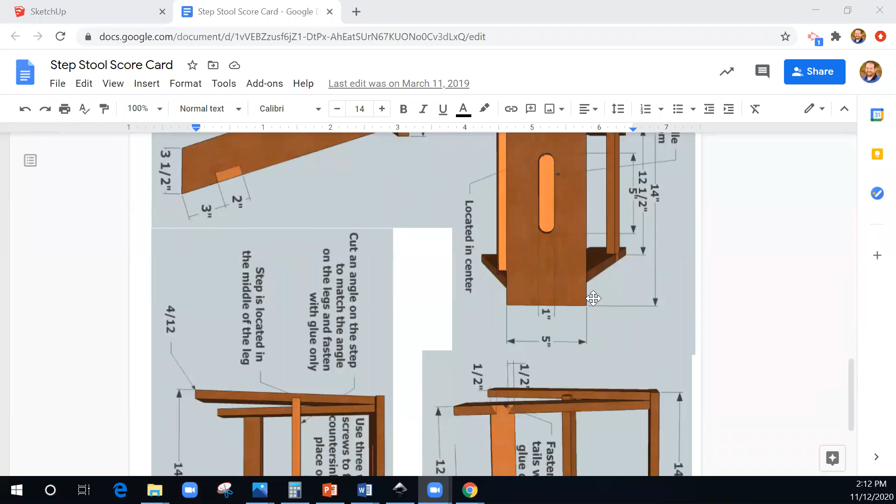Let me share this screen here. I'm going to focus on the step stool. It doesn't matter which one you build, I'm just picking this one because we did the video on the bar stool. A lot of similar concepts, a lot of similar things, but what I'll show you here will be very similar to the other one. Some of it might be almost exactly the same.

The biggest thing with this, notice how I have this build here with all the pieces, like the step stool combined together. But basically we have all these different pieces, and we really just need to focus on building those pieces. There's a couple things I'm going to tell you today that's going to make life a little bit easier, because some of this stuff you may not understand.

If you've watched the videos, hopefully you've done those and seen that build, because we do talk about the angle right here, this 4/12 angle. We talk about what that is, but I'm going to give you guys a little more information on that as far as building it, because it's a little different than doing it in person, or using a framing square to get that angle.

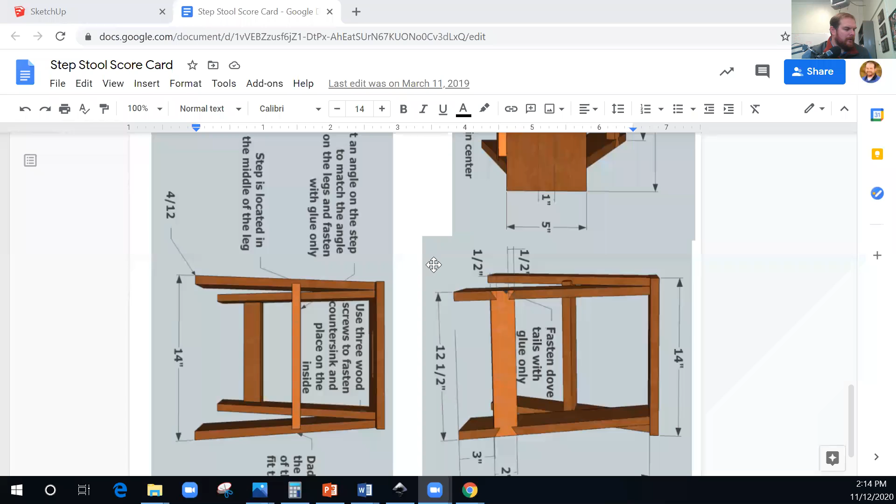Essentially what we want to do is just build a piece and build this out. It doesn't really matter where you start. I'm going to start with this little top piece right here, and then we're just going to build everything down underneath that. So this one is pretty easy, right?

We've got a rectangle, and then we've got a hole that's in the center. I may not show you all these dimensions—you guys have access to this stuff. What I'm more concerned with is not just giving you the right dimensions, obviously you can go back and forth with these things when building this. That's not a big deal, but it's more about how we're going to go about that process and how we're going to do that.

Question? Or is that one of the students coming in?

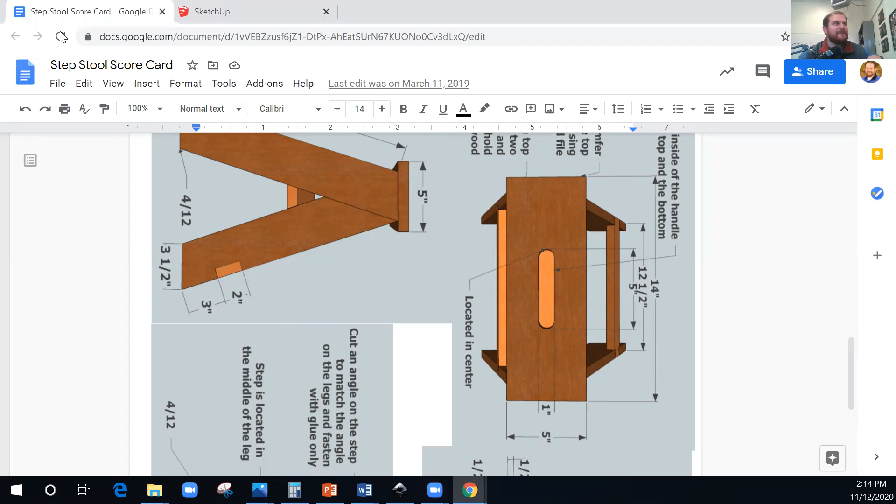Okay, so I'm going to have the dimensions up, but just for the sake of time, without having to sit there and make sure we get all these dimensions going back and forth, we're just going to build it from there.

Probably the best thing is to orient yourself, right? Grab that orbit tool. If you remember, we can hit shift when we're in this orbit tool, and we get this little hand where it'll shift things aside. We can orient this—I prefer to have it like a top view. So I'm just getting that stuff situated.

Now on the top of our step stool, we have a rectangle, and we want that rectangle to be 5 inches by 14 inches. So we're going to draw this rectangle, quickly click this, and stretch it in our right direction. We're not holding on to our mouse, if you remember that. And this is going to automatically go in feet and inches, because that's the template I selected. So I can simply put in 5.

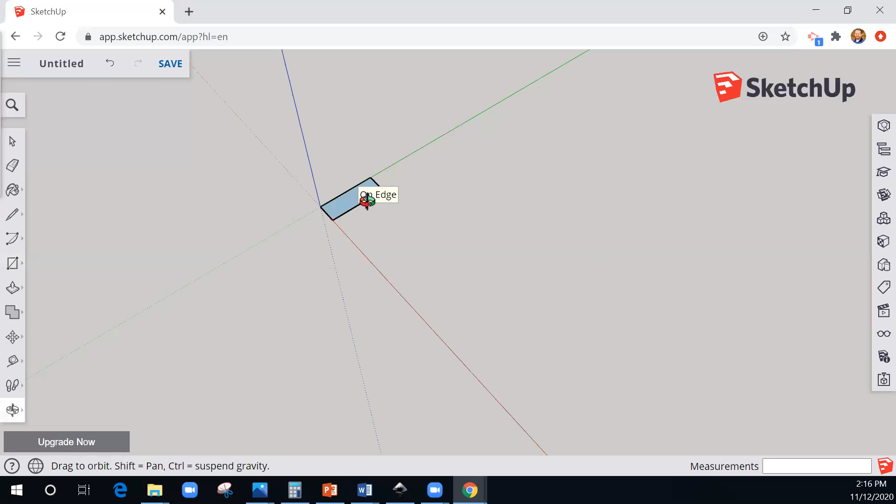I don't need to put the inch marks, just a comma, and I'm pretty sure we decided you don't have to put a space. So if I wanted a 5 by 14 rectangle, I could just do 5, 14, and it's going to automatically put this into inches. You can see we've got that rectangle there. I'm going to hit the O button on my keyboard to quickly get into the orbit function.

So this is kind of the start of our top piece. Now, how you do this can vary a little bit. You can stretch this thing out and make it a 3-dimensional object right now, or you can try to cut out that little circular part, that handle portion on this top step. It doesn't matter which way you do it, but it may be a little easier to build it in the flat position like this, and that's what we're going to do.

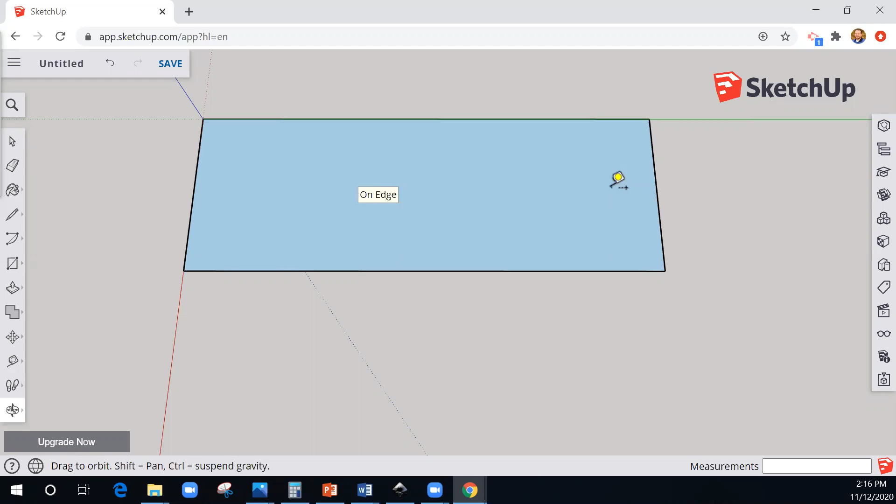When you're designing these things and putting them together, it's important to have your tape measure tool. You can hit T for tape measure, or go down here and you'll see it's got a tape measure. These create grid points, and they're not actually lines, they're just marking points. If you click your mouse, it'll automatically snap to that. So if I click here and draw a line, notice how it hits that intersection. I could draw a line up, and we've done that.

If you guys remember when we did that dustpan, it's really the same exact process, but we're going to hit escape and go Control Z to undo those lines, because we don't want that.

Now this handle is going to be 5 inches wide from the sides, and we want this thing in the direct center. So with these grid points, we can grab this little tape measure, and we know this thing is 14 inches here, so we'll type in 7 to get our 7 inches. We know it's 5 inches here, half of 5 inches is 2.5, so I'm just going to stretch those two things in that direction and get 2.5 here. That's going to help us out.

Now we've got this little center point. We want to make sure we have these things, and we want this to be 5 inches in total length. So to do this, we want to measure 2.5 one way and 2.5 the other way. But there's a bit of a complication because we have a circle that's going to be here, and we want that circle to be the very outside edge.

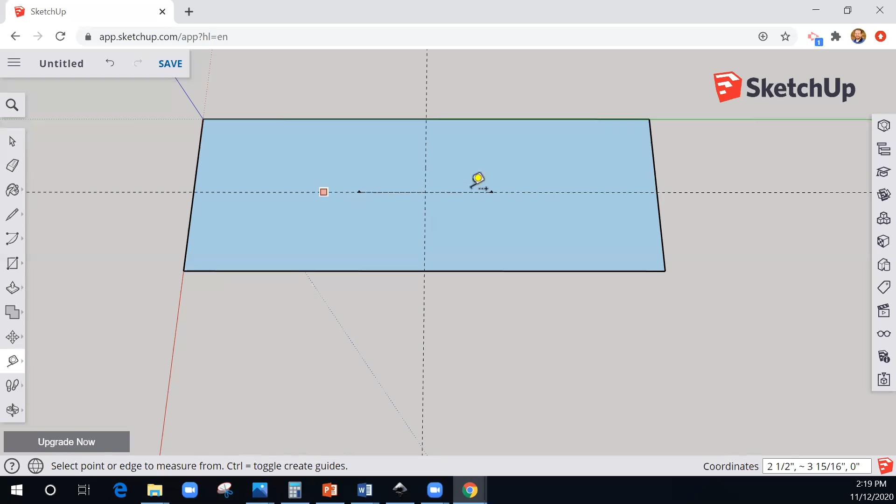The width of this handle needs to be 1 inch wide. So when we draw a circle, we're going to draw it from the center, and it's going to extend out a half inch this way and a half inch that way. But that's going to give us our 1 inch width. And it's also going to add a half inch here, and the same thing's going to happen here, a half inch. So the total length from one end to the other is going to be 5 inches.

This is the same stuff we would do as we're laying this out on a piece of wood. It's exactly the same process, we're just doing it on a computer as opposed to anything else.

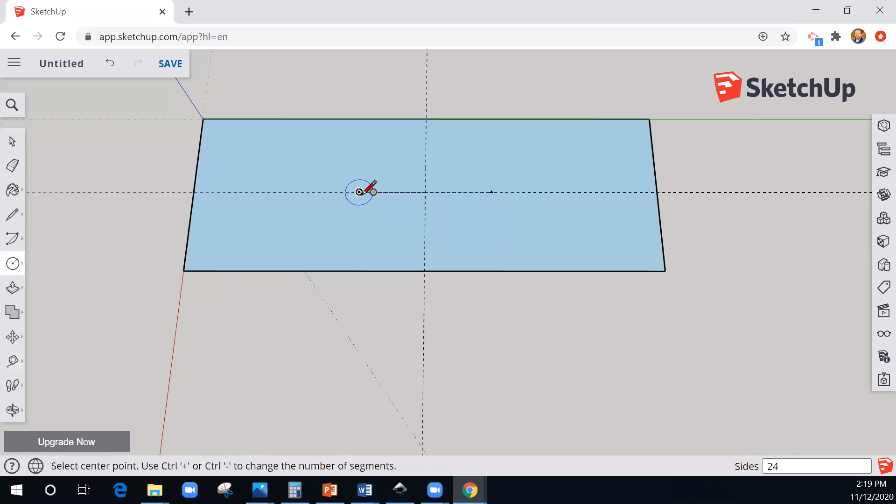So I'm going to hit C on my keyboard to get my circle tool. I can stretch this thing out. These things measure the diameter, so we want a 1 inch circle, or actually they measure the radius, so we want a 1 inch diameter circle, meaning we're going to put a half inch, 0.5, on there. You'll notice we get a little circle there. We're going to do the same thing on this side, and get 0.5 right there.

Now we've got kind of the portion of our handle. All we got to do now is draw a line from the very top right here to the very top right there, and then delete some of these things. We'll do the same on the bottom. I'm going to hit L for my line tool, or grab the little pencil right there, and draw a line connecting those two points together. Same thing right there and right there. Now we've got these things.

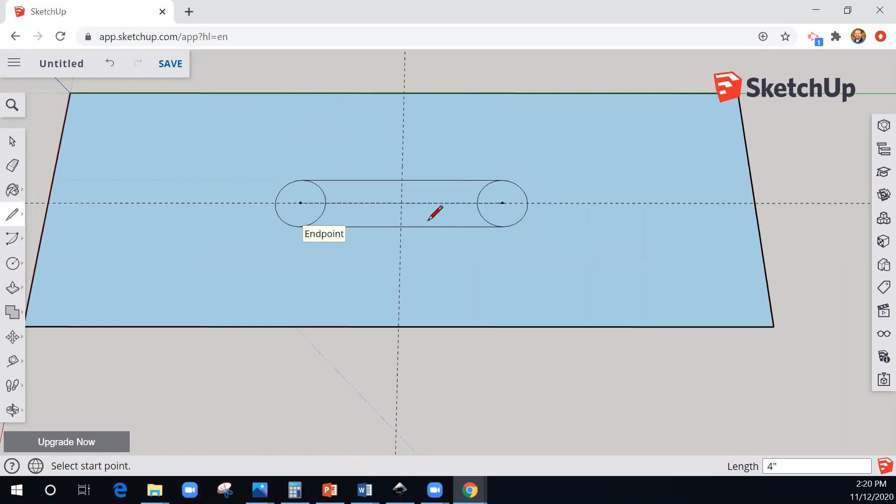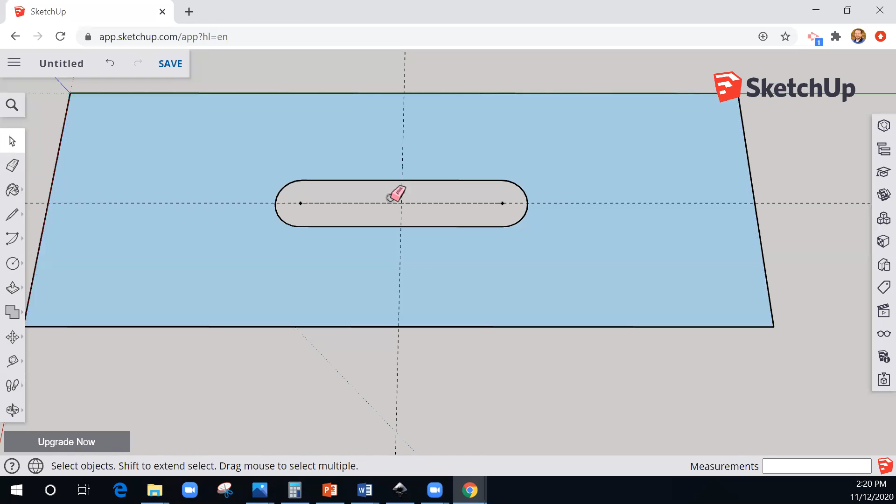We want to simply erase that center portion, so we grab the eraser tool, or hit E to do that. We've got those things there. Now spacebar gets you back to your selection tool. Notice I can select that and select this as two separate pieces now, since this has joined those things up. I'm going to select that center portion and delete it, and erase these measurement marks here just to get rid of them.

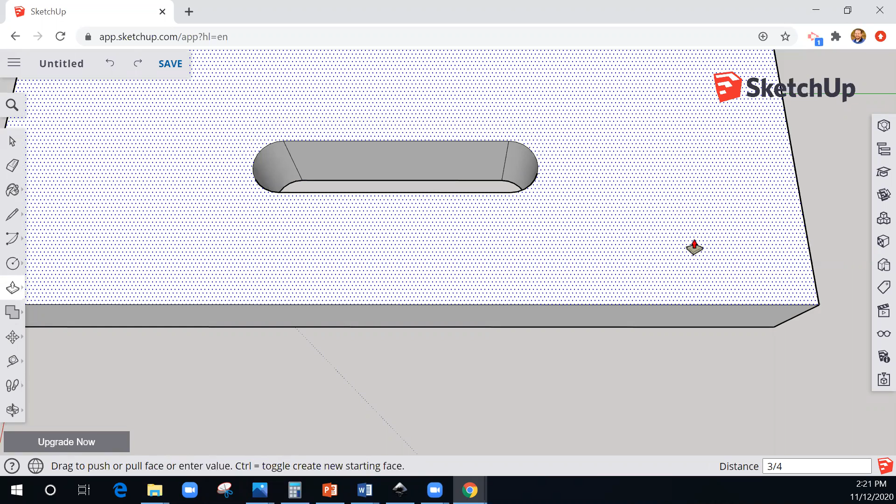Now the last thing I need to do is my push-pull, which you can find right here, or you can hit P for push-pull. Quickly click on that and you can raise this thing up. All of these boards, every thickness, is going to be 3/4 of an inch thick, so we can type in 3/4 and hit enter. If we orbit around, you'll notice we now have that little top piece basically situated here. So you've got that top piece created.

We can color this. I don't know if I've shown you guys how to color these things at all, but we can color them if you want to. It's not incredibly necessary, but it does kind of dress it up a little bit.

What we're going to do is go to our little bucket right here. We can find different materials if we want. So if we go over to the little search thing, if this is going to be a woodworking project, we would obviously want to have it as wood. You can select the piece that you want, and if you like this color, click on that and paint those things. You can go around and hit all.

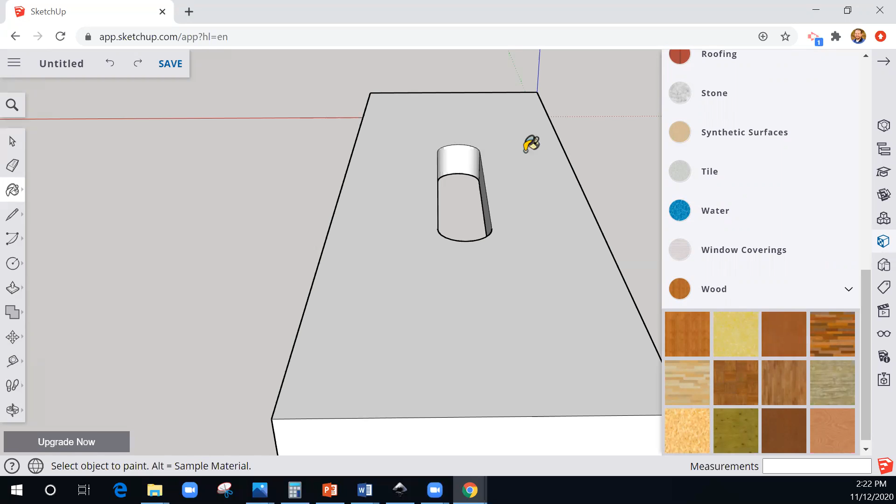Why is my computer not working?

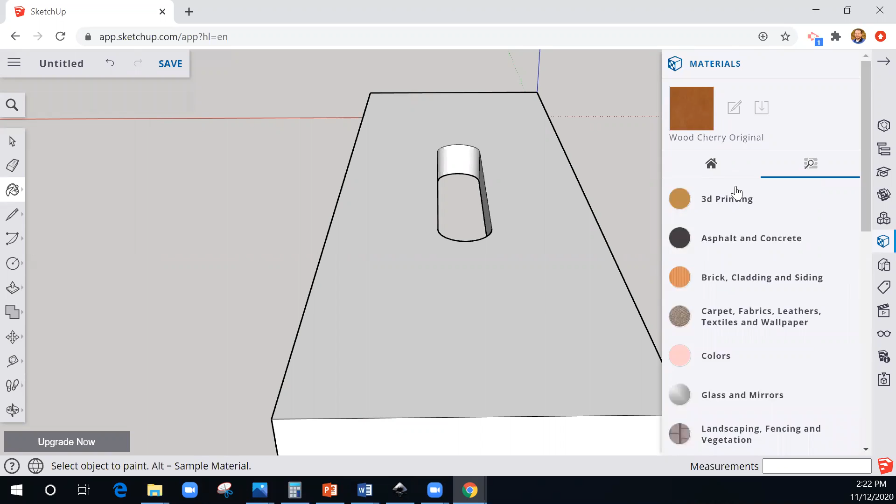Naturally, so we did a wood cherry right there. There should be a way - I forget on this online version - that we can adjust the material a little bit, but I'm not seeing it right now. My computer does not want to run. It is not working well for me.

Okay, there we go, so we can kind of paint that. And you'll notice it's a little bit fuzzy. There is a way to do this, let's see. No, I don't want to do that. Okay, I'm not worried about that, I'll have to figure this thing out.

But if you want to color, you can color these things any color. You can click on all these things here and do that. Or if you want...

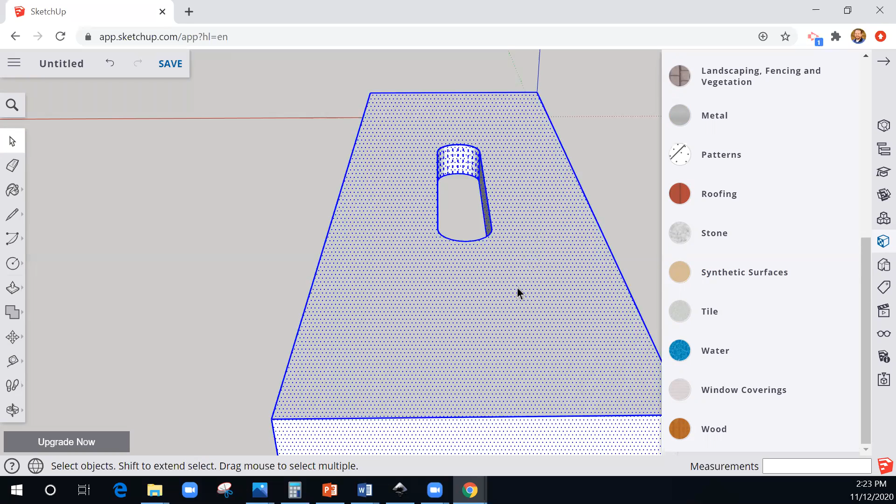Before we get to the step of painting, we're getting our selection tool, and this is kind of an important aspect. If you're building these things, you're building them a piece at a time, and then you want to put them all together so we can orient them. Notice I just triple click this - notice how it highlights everything. Not a double click, I don't want to just grab one surface right here. I want to triple click so that way I get everything in this.

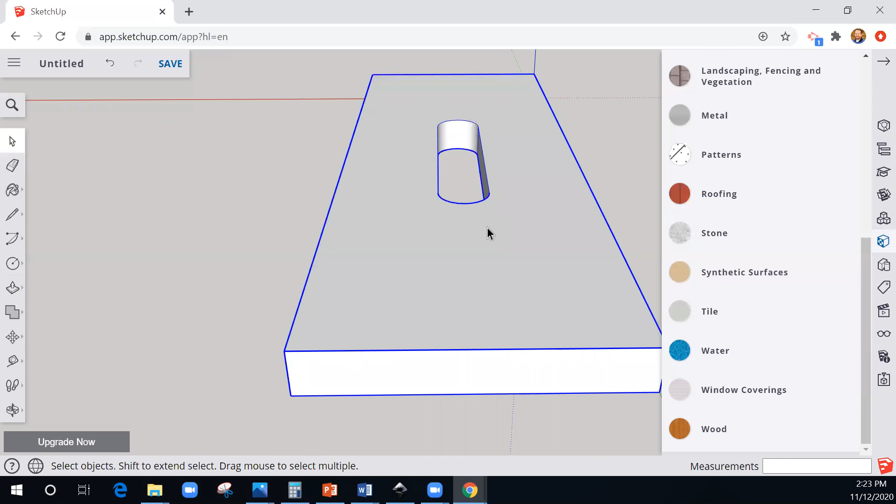You can go ahead and right click, and make this a component. I'm going to label this the top step because that's what it is. I hit enter, and now this piece is one united piece. You can click into here - notice how you get this little dotted line box. You can still edit and modify this if you need to, but if I put another piece on top of this, it's not going to stick them and glue them together. I think I've shown you guys that, but just to reiterate that stuff again.

If you like a different color, you can change these things, make them whatever color you want - completely up to you on how you want to handle that stuff. But anyway, we'll just leave it like that. We've got that little piece there. Now the color just kind of dresses it up a little bit.

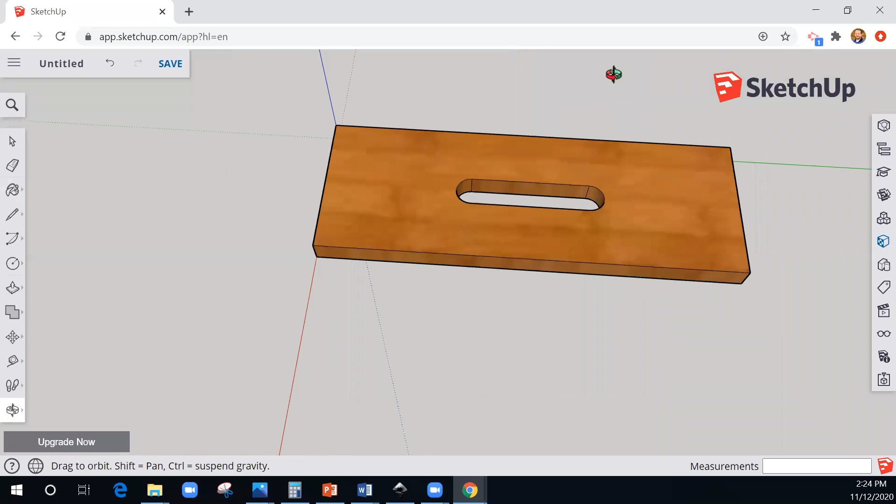Now there's a couple of things with your legs, and these things are going to be a little bit different, okay? Because that's probably the next thing that we want to build in here - our legs. And you'll notice on these legs, if I can bring this thing back into here... that's not the right thing. Go away.

So on these legs, they're 17 inches. You'll notice there's an angle. The angle on these things is a 412. If you don't know that, you can look up into right here, leg angles 412.

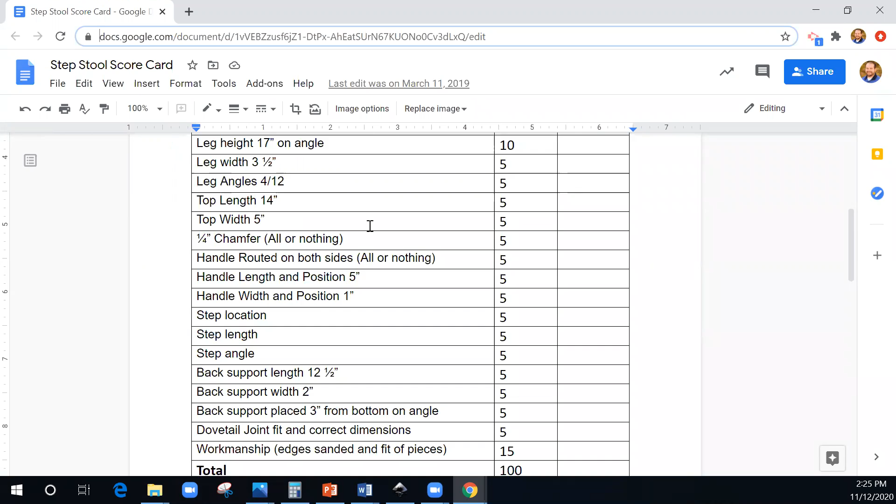Now, what a 412 means - I hope you guys have watched the video because it does explain that - but 412 essentially is what we determine as rise over run. If you think from a math class, it basically is saying that for every 12 inches you go across, you're going to rise up 4 inches. This all has to do with building rafters and things like that, and that's kind of how we get those angles.

So the purpose of that is so we can teach you how to use a framing square properly. Again, in the woodworking video, it demonstrates that. If you haven't watched that, watch it because it's going to explain that and you'll be able to see what I'm talking about.

But for a 412, or if it's the bar stool, it's a 212 - it doesn't matter. It's really kind of the same process on how we do that, but the angle is obviously going to be a little bit different. When you think about rise over run, you're basically saying for every 12 inches we go over, we're going to rise up 4 inches.

And we could do the math and try to figure this out, but I'm just going to tell you that if it's a 212, we're going to do a 10-degree angle, and if it's a 412, it's going to be a 15-degree angle. Those are roughly close to what the angles are going to be on these pieces.

So that's going to be kind of important. We want these legs to be 17 inches on the angle, and we want these things to be a parallelogram. A parallelogram is basically a tilted rectangle. We don't want a trapezoid, right? We want a parallelogram, so we want to make sure this angle is going to match up with that angle right there. So that's kind of some important things.

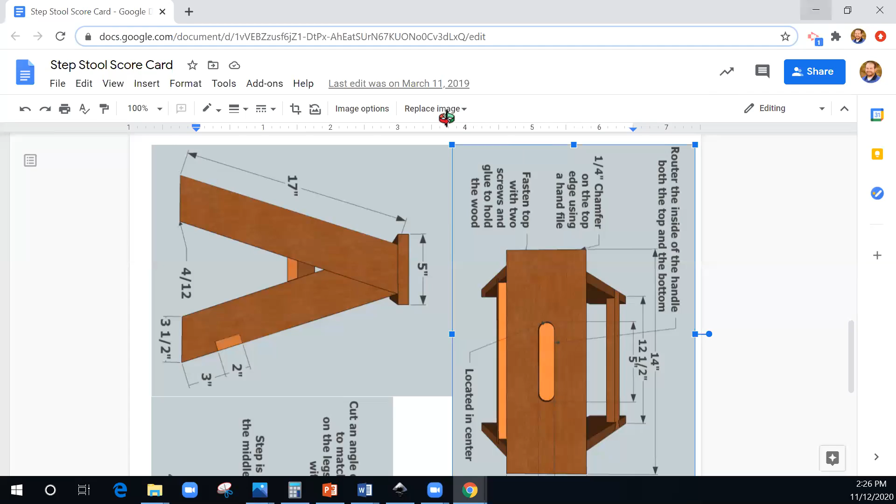We're going to be 3.5 inches wide on these things as well. Now you could build these things in place, or we can just stop and get these things oriented later. So I'm just going to build them separate here, and then I'll show you how we can modify them. Oh, one other thing on these legs.

There are 2 front legs that are a mirror image of each other to accept this little piece right there. You'll notice we have a little notch out of that leg. And then the 2 back legs are going to have that little dovetail that's going to be in those things. So those ones are going to be identical, but the 2 front legs are going to be a mirror image of itself.

But we can save ourselves a lot of time, and it's the same thing with the bar stool if you decide to do that. You can save yourself a lot of time by building these things. So we know we want to be 17 inches. When we go to cut these boards, because when you cut the angles, they're going to be a little bit smaller, we actually want to cut these things to 3.5 by 19 inches.

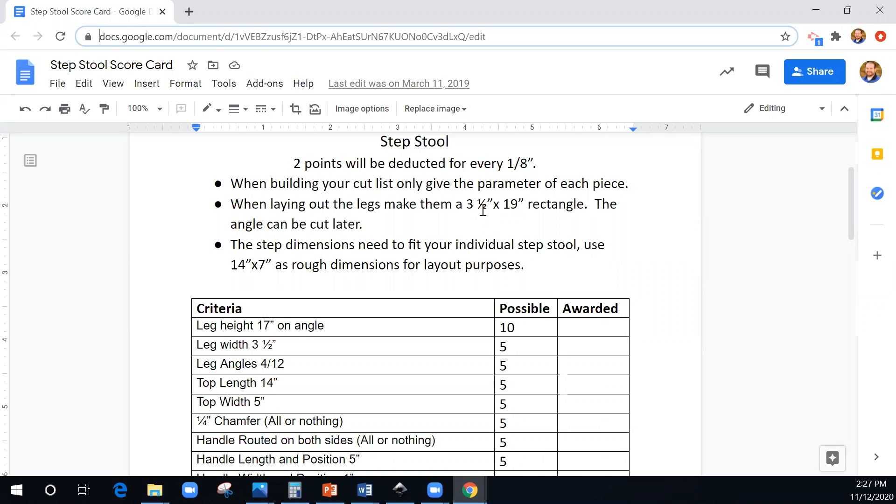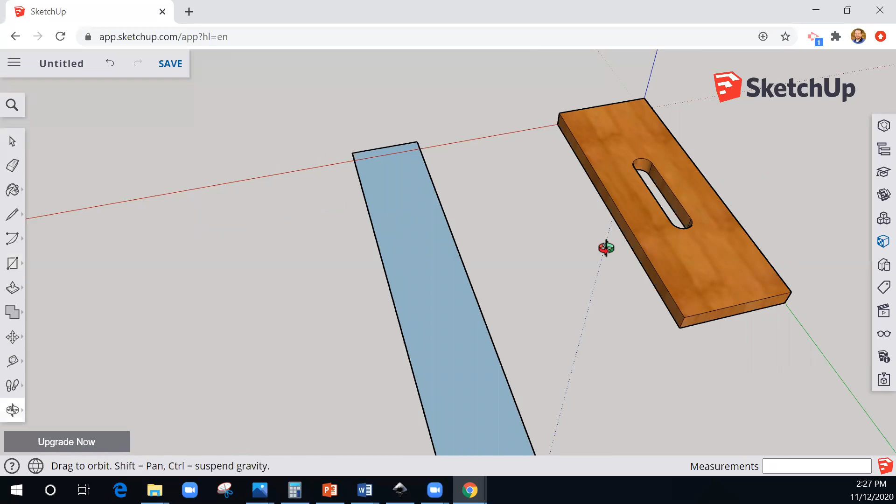And so we're going to do the same thing in Google SketchUp. We're going to grab a rectangle - I'm going to hit R for rectangle. I'm going to grab this leg and just stretch those things out. I know I want to be 3.5 inches, and I want to be 19. We're going to trim these things down a little bit here, so it's not going to matter too much.

I'll show you kind of another way. We can raise this thing up to where we have that 3/4 inch right now.

And then we can get our angles built in. To get our angles, what we need to do is go down here to the little tape measure tool there. You're going to see it's a protractor. So now we've got a protractor here.

What we're going to do is click on that corner - notice how it sits there and is oriented. We're going to click up there, and then we're just going to go, look at it snapping to a 15-degree angle. We'll type in 15 and hit enter.

What we want to do is the same thing on this, but first we want to grab our tape measure tool and measure 17 inches right here, because it's got to be 17 inches on the angle. Notice we've got this little point right here that it gives us. We're going to go back to our protractor tool.

We're going to click right here. We're going to stay perpendicular, go that way, and then type in again that 15-degree angle, and hit enter. That's going to give us our 17 inches on the angle there that we need.

We can now take our line tool and draw these things across. We'll do the same thing on this side, clicking in both spots. And like I said on the other one, you could have raised it up and then done it, or do all the layout work and then just raise it up.

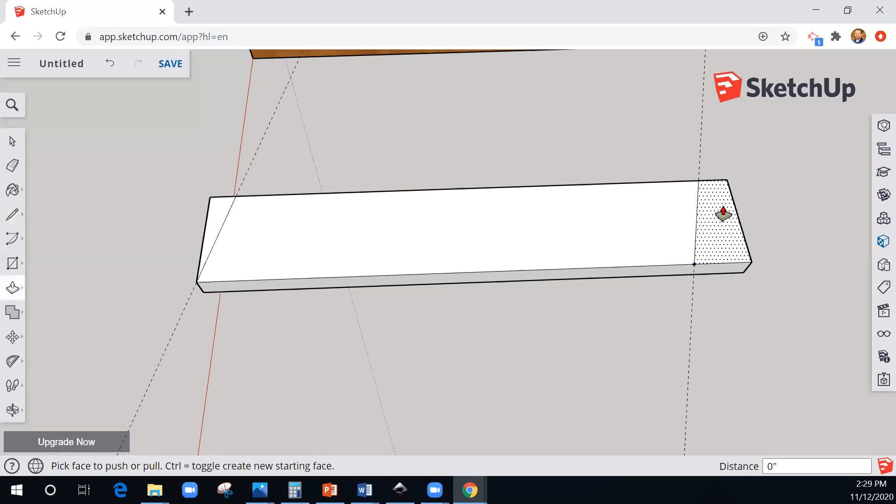On this one, to basically erase these lines, we're just going to take that push-pull again. So I hit P to get push-pull, and I'm just going to drop this thing down to 0, and notice how it erases that. We're going to do the same thing right here where we just drop that down. And now if you look at this, we've got a little angle right there.

That's kind of the base leg that we have, okay? Now, if we wanted to, what we could do with this to save you guys a little bit of time, I'm going to erase these 2 lines right there.

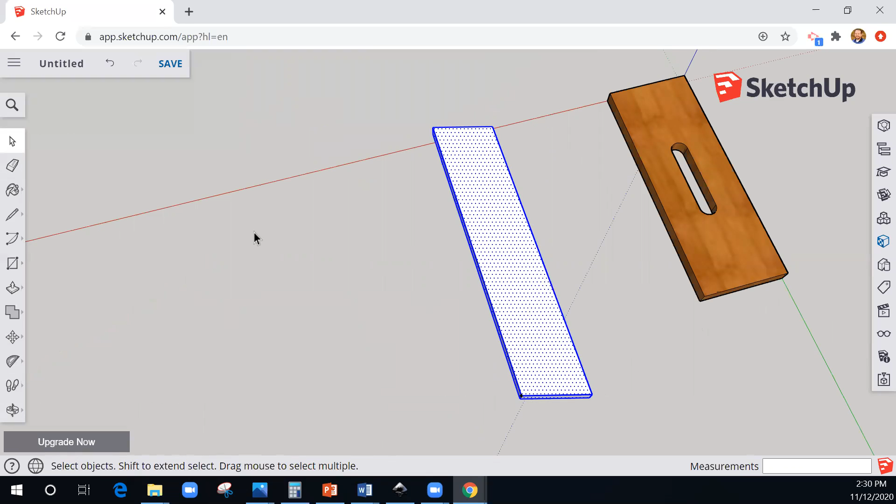What we can do with this, grab our selection tool. We can grab that whole thing and we can go just like a standard Word program or something - we can say Control C to copy it and then Control V to paste it. And you'll notice now I got 2 copies, I'm just going to set that thing right there.

So the nice thing with this is I've got 2 copies of these things. This is exactly what we want, this is what we're looking for. On the back side of one of these things, we'll do one leg here - we'll do this leg, we're going to put this leg, it's going to be the dovetail, and we're going to need 2 of these things.

So to save yourself some time, you're basically going to do this once - you don't have to do this twice. If you do the bar stool, all 4 legs are identical to each other, so you do one, and then you can simply just copy them across. With this one, there's 2 different legs - one is not necessarily harder than the other, they both have some differences to them.

But let's say I don't really like the orientation on this thing. So what I'm going to do is take this little move tool here, I'm going to go rotate. What I'm going to do is try to get it on this green axis right here - see how I can hover here?

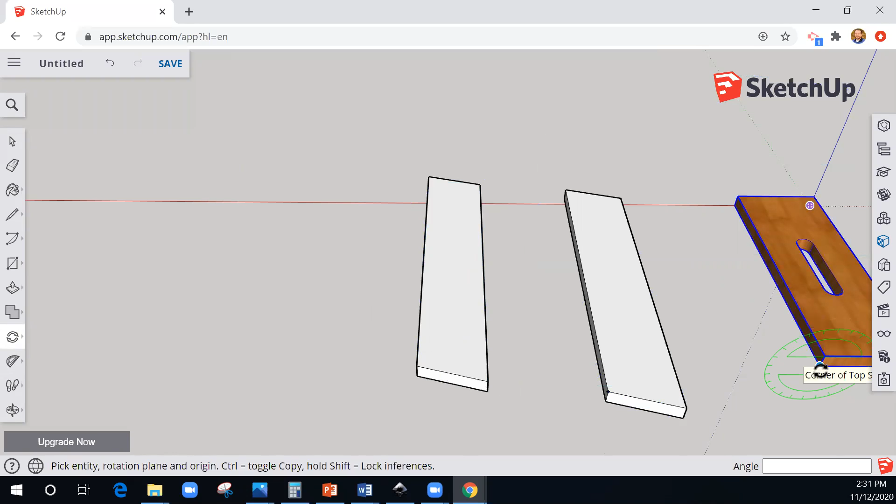I'm not going to click there, I'm just going to hold it there to where it's got my green. Right here, see how it's kind of blue? What I want to do is flip this thing and rotate this up. Maybe it's probably best to just show you.

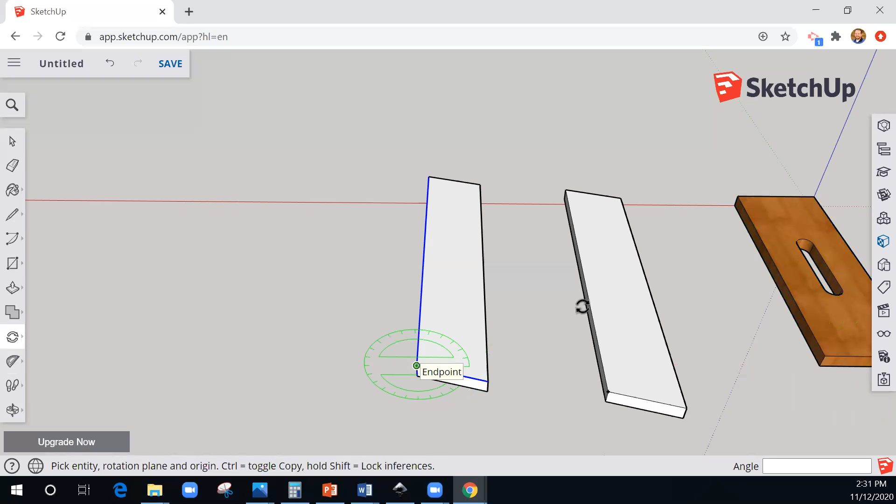So I'm going to take this right here, hold shift. I'm not clicking there, and then I'm going to click on this little top piece right there - oh, I got to select this whole thing. Let me get out of here, alright let me select that whole thing there, and then I'm going to hit rotate.

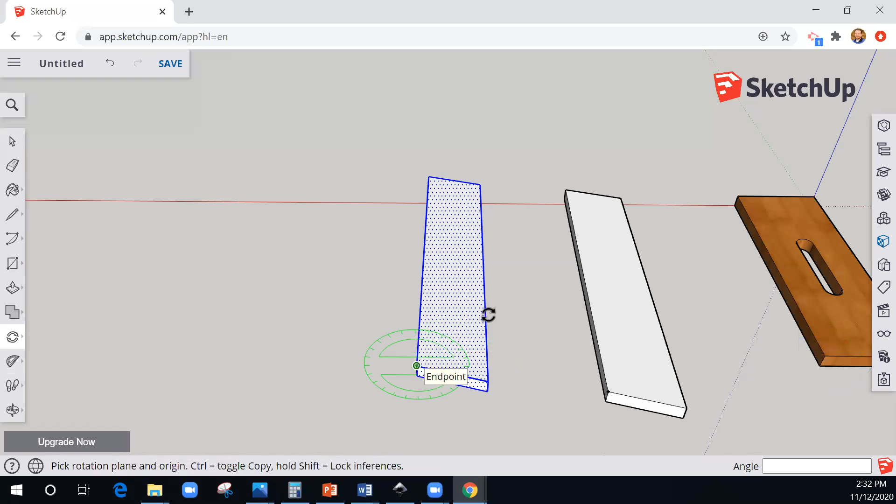No, that's rectangle, I don't know what my rotate key is - I'm just going to go to this thing, I'm going to go to rotate. Notice I got that whole thing selected. I'm going to go over to this little piece right here where it's going to be on that green axis, hold shift, grab this top corner, click right there in that top corner, click on this red axis, and then now I can just flip this piece up right here.

So now we've got that piece that's there, oriented a little bit better. On this piece, without going too much into dimensions, we're going to create that little dovetail. From this point up, we've got to have 3 inches up.

Okay, so we want to be 3 inches up from the bottom, and then we're going to be 2 inches up from there.

I want a line, so I'm just going to redo this thing. See how I redo it and I get a line? I don't know why it does that, it just does. So these pieces now, I guess these things aren't necessarily a mirror.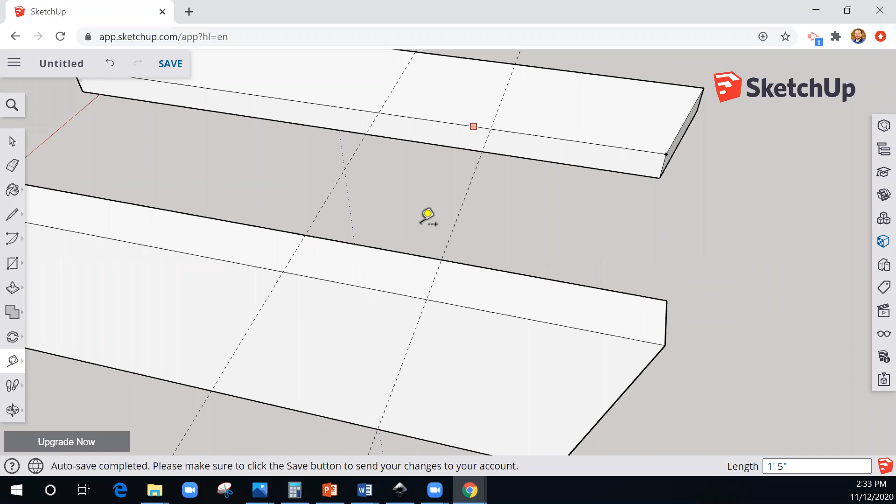These ones have got to be mirror images of themselves too. Oh whoa, what did I do? I lost my spot. Okay, so on these things, we want this angle to kind of come down.

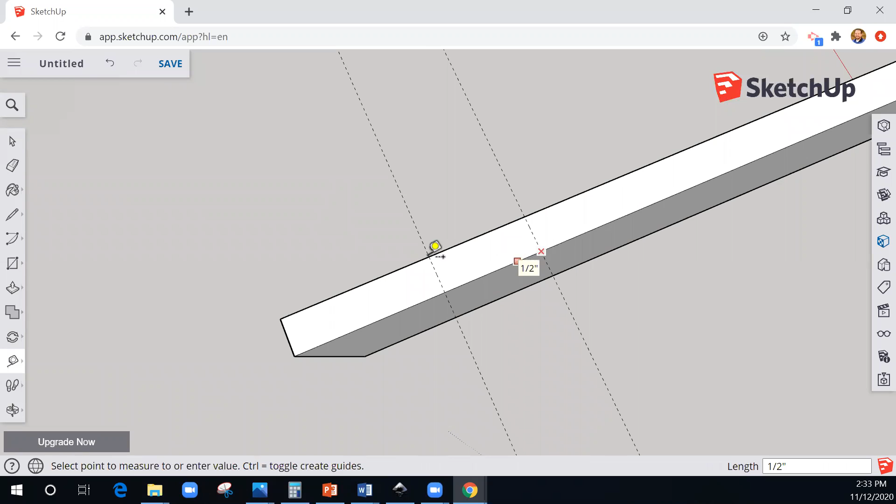On this thing, we want to measure 3/4 of an inch down, and we're going to measure a 1/2 inch in. We're simply going to do that right now. We'll measure a 1/2 inch, it kind of gives it to us. 1/2 inch, we'll measure those things in.

I'm going to take my line tool. I'm going to draw a line from there to there, and I'm going to draw a line from there to there. And then I should be able to drop this thing.

This thing needs to fit a 3/4 inch board because you've got that one piece that's going to go in there, that dovetail. So we're going to drop this thing down 3/4 of an inch, and it's going to cut that stuff out. We'll go my orbit tool so you guys can see, and you'll notice we've got that portion of that dovetail right there.

Now, I did tell you that they're a copy of each other, but they are not. The other leg we're going to do has to be opposite of this. So what we can do, if you want, we can kind of copy this thing here.

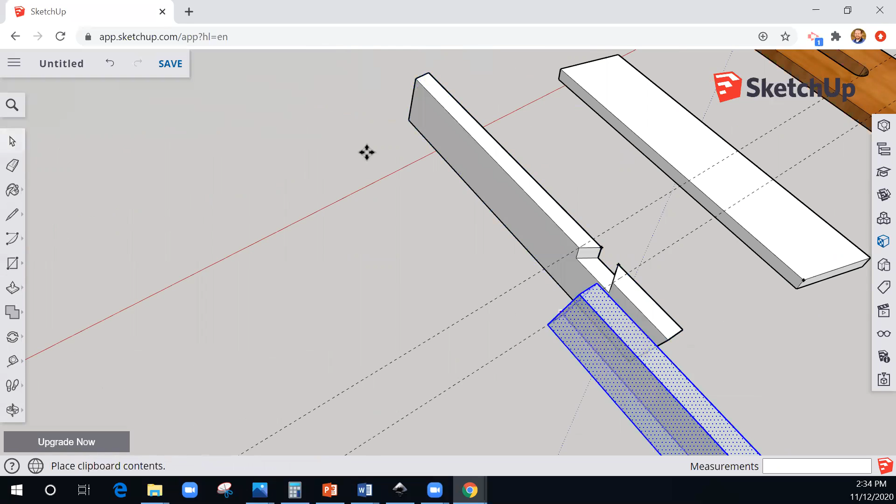We can go Control C, Control V. Notice we've got another copy of this thing right here. And then all I'm going to do right here is leave this thing probably the same. I might actually move this and get it right on that line there.

Okay, so I can get it right on that line. I don't want to do that. We're going to push pull, we're going to lift this thing up to the top.

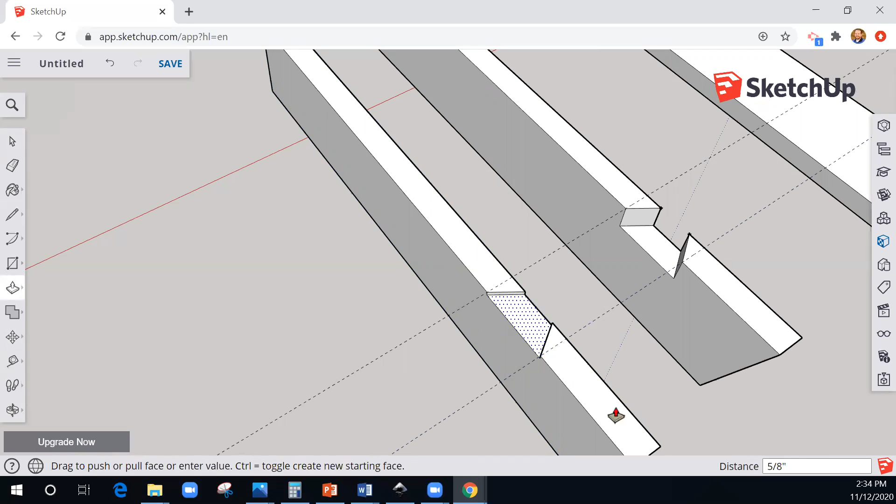And then we want these angles to be going in the opposite direction. We don't want them going in that direction there, so we're just going to go opposite of them. So I'm just going to erase those lines here.

And instead of measuring on this side, I'll just measure on this side. We'll go a 1/2 inch there, we'll go a 1/2 inch there. And then we can just draw our line to kind of go across.

The same thing, we'll just grab our push pull, we'll drop this thing down 3/4 of an inch. And now we've got both of those pieces there. This one really needs to be moved over on that side.

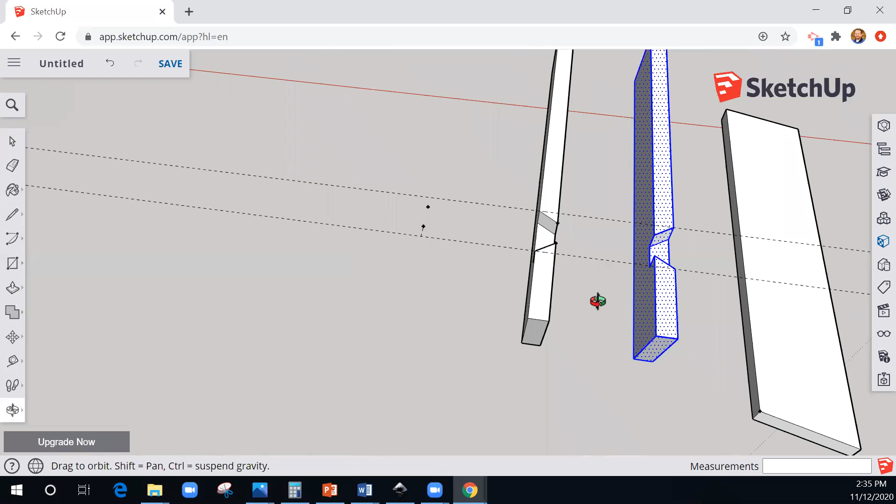And that's a little bit more of how those things are going to be oriented. Probably an important thing to do with this is to take this thing. We want to make sure we make them components, because if we touch, they're going to do this. So we'll go back, leg number 1. And now that's a component.

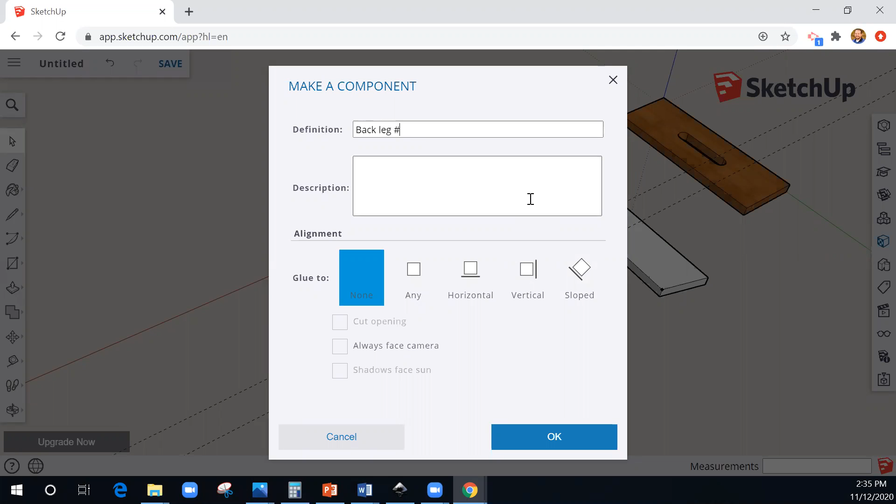We're going to select this one, we'll do the same thing, but we're going to label that back leg number 2. So those things are done there.

We've got this piece here, we're going to move this one out, we're going to get this thing kind of oriented. Now on this piece right here, what we've got to do is we need to create this little notch that comes out right here, so we need to notch it for that little step.

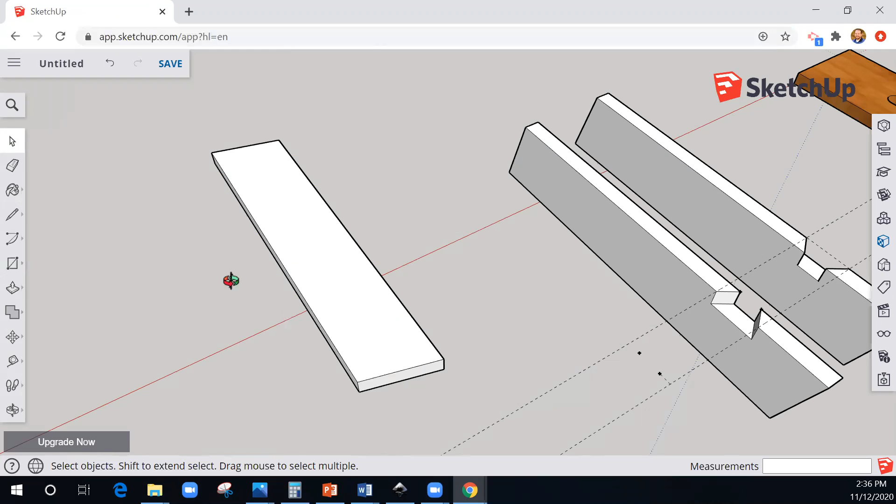So to do this, this thing needs to be in the middle. So if we have this step, we should have, let's go from the edge here, we should have 17 inches right there.

8.5 is nice because it goes right to the center. So we want to have that center point. Then what we're going to do is measure. Let me zoom in. This board we want to be in the center, and if it's a 3/4 inch board, we want to go 1/2 of 3/4, which is 3/8. So from this point, we're going to measure up 3/8.

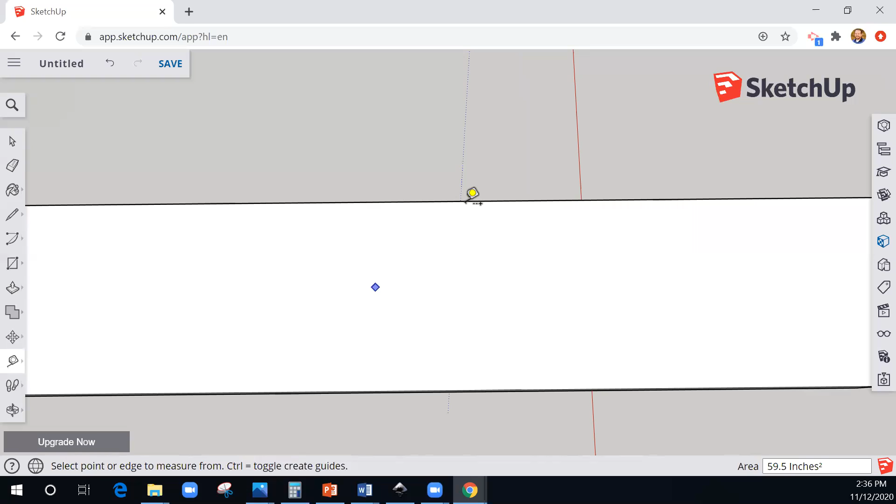Why is it not doing that? Hold on, it's not wanting to work with me right now.

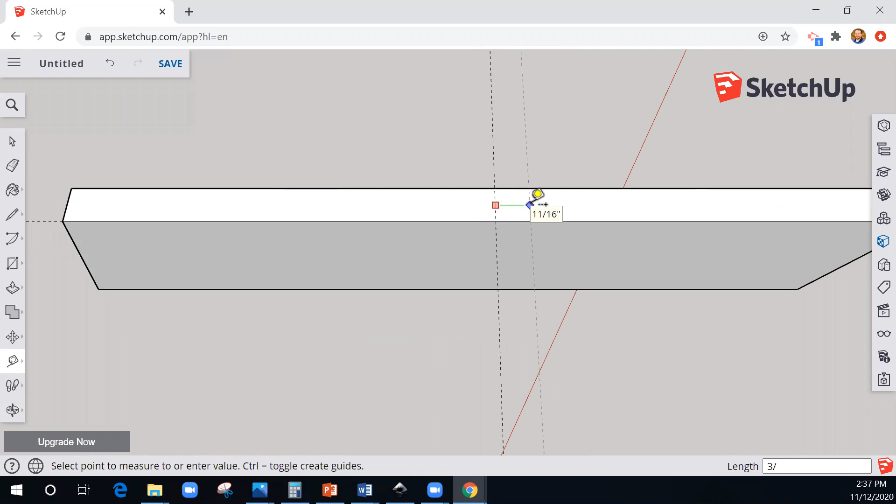Let's orient ourselves a little better here. Let's try this again and create a line so we can see this. 8.5 is 1/2 of 17, so we've got that, there we go. That looks better. We want to be 3/8 of an inch on one side, 3/8 of an inch on the other side.

Now that we've got those things marked, we can get ourselves oriented a little better for this top piece. So this step—gosh dang it, what the heck is going on? I cannot control this thing right now.

Okay, there we go. We want that angle not to go straight across. We want it to be at that same angle that we have here. So I could take Control C and copy this little piece right here, and you'll notice I can just grab that end and I should be able to—why is it not doing that?

Okay, that's not going to work. I thought I was going to make life a little easier, but that's okay. We can go back to this protractor tool, grab it right there on that first line, stretch it to here, go 15 degrees—that's going to give us our same angle.

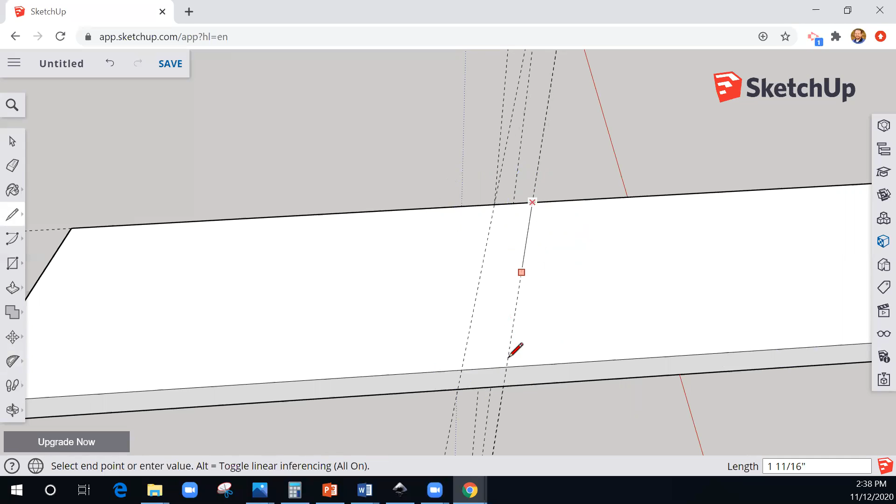We'll do the same thing right here. Got to make sure you stretch it across, so you want to be on that red axis. In this case, stretch it in the direction, go 15. We can now draw our lines just like normal. Boom, boom. And then the only other thing we need to do is the depth of this.

We want to go down half the thickness of the board. Half the thickness of that board is going to be 3/8 of an inch. So you can grab those pieces that we created, stretch this down. We don't want to go all the way, we want to go half.

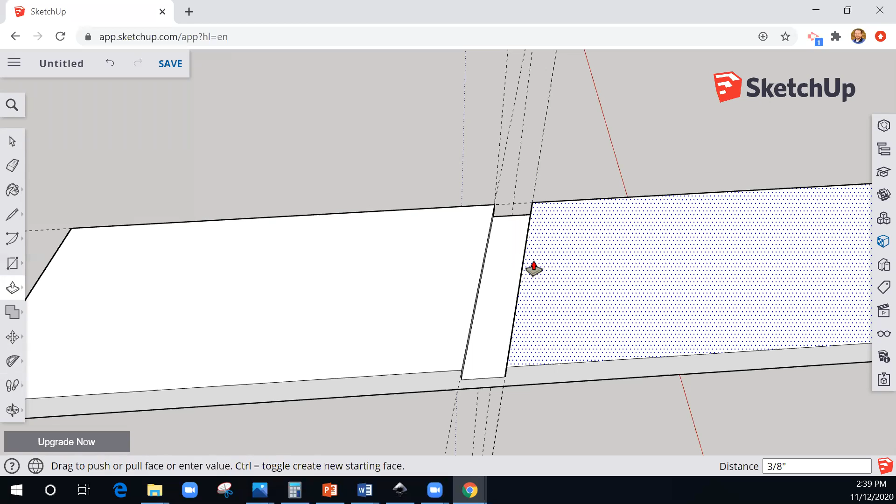So we're going to take 3/8 of an inch—that's half of 3/4. And you'll notice we've got our little piece right there that's kind of situated. We'll do the same thing for the sake of time. I think I've got enough pieces.

Obviously, the angle on the other side is going to be opposite of that. And what we may be able to do is go Control C, maybe we can make a copy of this and just make a quick modification to it. So that's my piece there. On the other one, you want this piece to be out and that piece to be up. So maybe what we can do is...

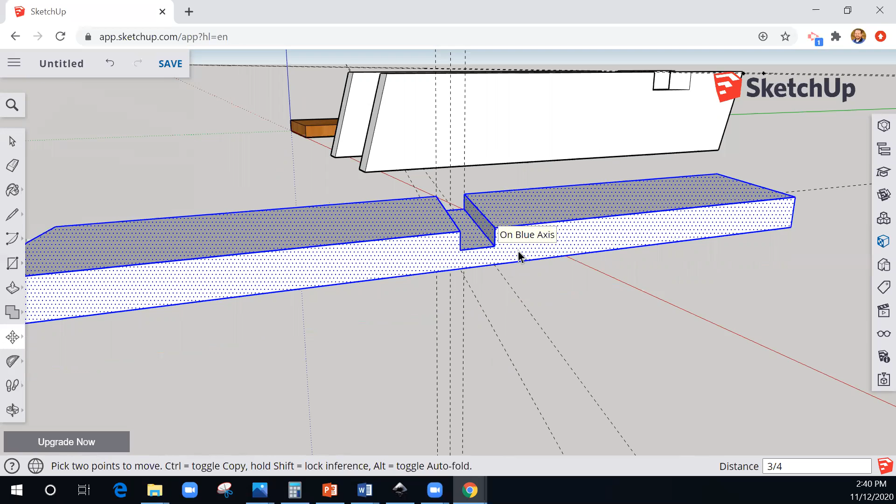Grab this thing, and let's grab this thing, let's move this thing up. We're going to move it up 3/4 of an inch so that way we have those marks already there. And we'll go ahead and just draw these lines there again.

Oh, it didn't click, come on. They don't want to do it for me. Okay, there we go.

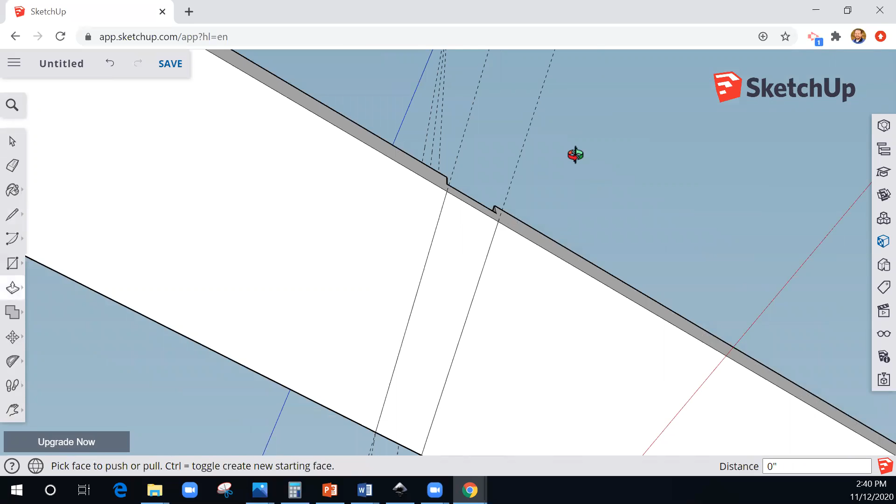All right, now we got those lines drawn on there. We're just going to bring this to the top. We can erase these two lines because we don't need those things anymore. And now we'll grab this one and go 3/8 of an inch. So now we've got that. I personally don't like to have a bunch of lines on these things, so I tend to just erase them when I'm done because they can get annoying.

So now we've got these pieces here. What we need to do is orient these things. We're going to flip this one, and do that little rotate function on this one so we can have it facing up. We'll do that same thing—it's important that I get that little green axis there. Let's make this a leg. Actually, let's make that a component first. Let's go front leg.

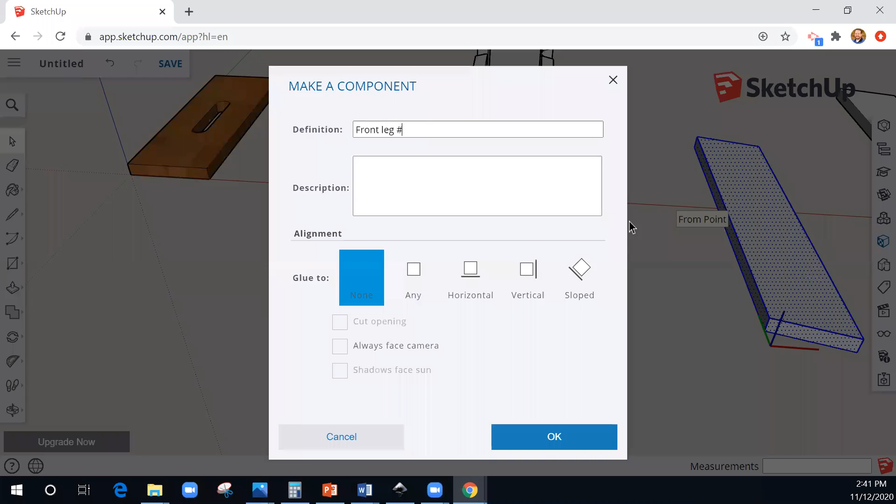It doesn't matter what you name these things, but making them a component is one of the biggest issues I had when I first started using this program. And I didn't use them. I didn't make these things. So now we've got that.

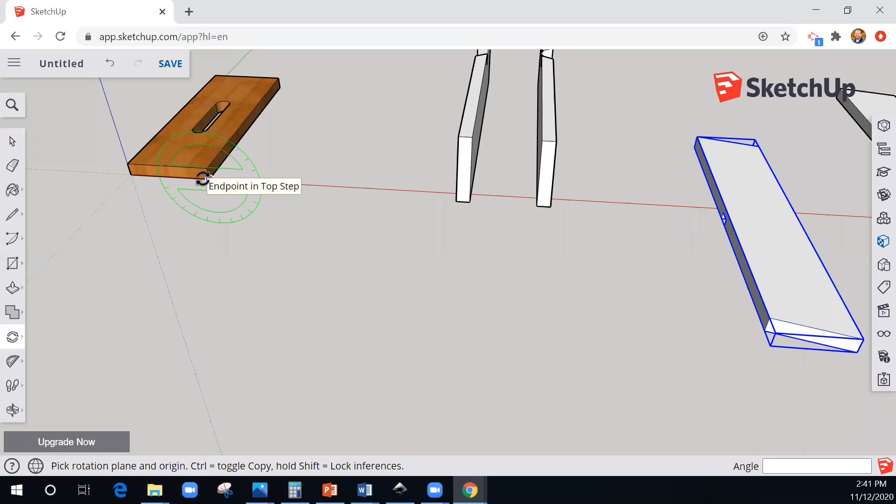Let's try to rotate this thing a little bit here. It doesn't really want to grab where we want, so we'll go here, we'll hold Shift. We can then grab this thing and rotate it all the way around on the red axis. We're just going to make sure we're on the red axis again right there, and that's going to give us these two kind of flat pieces.

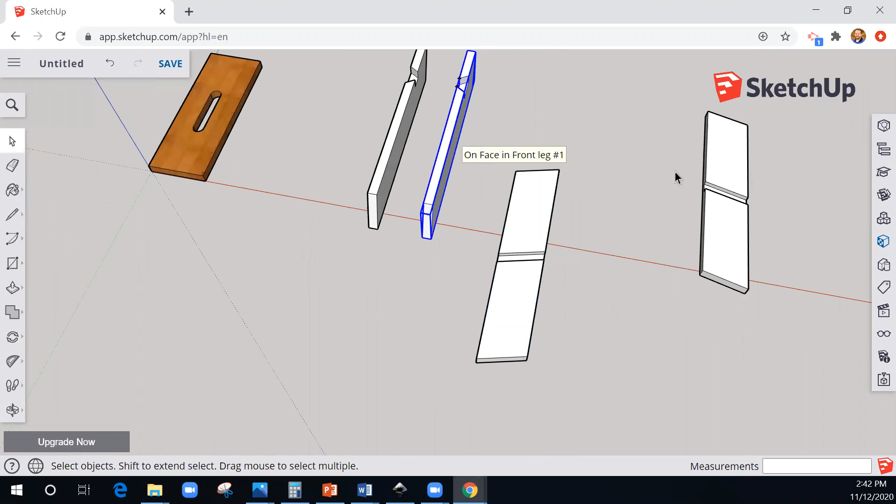Now we want to do the same thing with these pieces here. Maybe we'll orient ourselves this way. To line these things up, we want to lay these pieces down flat again. So we're going to take these, rotate them, do the same thing, hold Shift. We can grab probably this bottom corner right here, click it there, and then it'll drop. Now if these things touch, make sure it's on the blue axis.

If they touch, it's not that big of a deal, because we've made these things components, they can kind of touch. We can take this thing and grab it, move it, put it inside of it, but then we can also move it, and it's not going to attach them together because they are separate components now, the way that we have this thing designed.

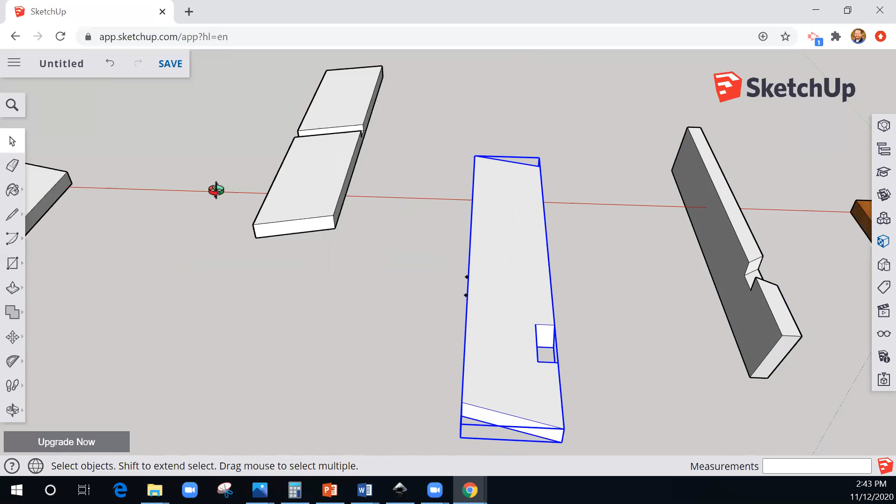So the only other thing we've got to do is basically just move this thing on top. What we want to do is grab this little corner right there, and we're just going to raise it on top of that corner right there, and we'll connect these things together. We want this corner to be here, so for us to do that we go back to that rotation tool.

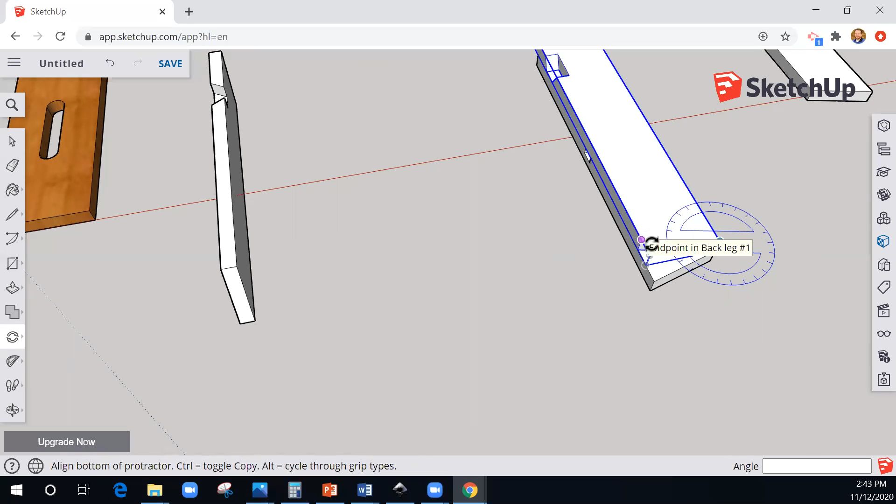We want it to rotate and pivot on this thing. I need to hold shift because I'm on that blue axis, and that's going to cause this thing to shift. So what we'll do is we'll just kind of click it. Actually, let me start over. Go down at this very bottom right here. This is going to make life really easy for you.

And then we can go right to here, and then we can simply just pull this piece. So I clicked in the corner there, clicked right there, and I'm going to put it right up in here, and I'm going to click those things together. Now I've got those pieces, they're together. We would obviously do the same thing with the other side there.

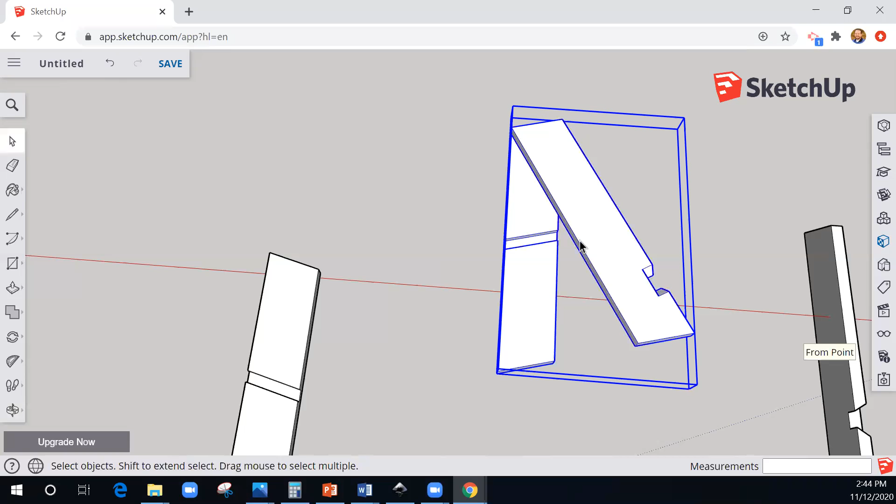What I can do, and this is kind of a cool thing, is I can hit shift, and I can select both of these, and I can say make this a component, and I can call it side 1 if I wanted. So now those legs, if I grab these, notice how they move together. I basically combine those things and joined them. I can still go through and edit this leg and edit this leg separately, but it makes my life a little bit easier.

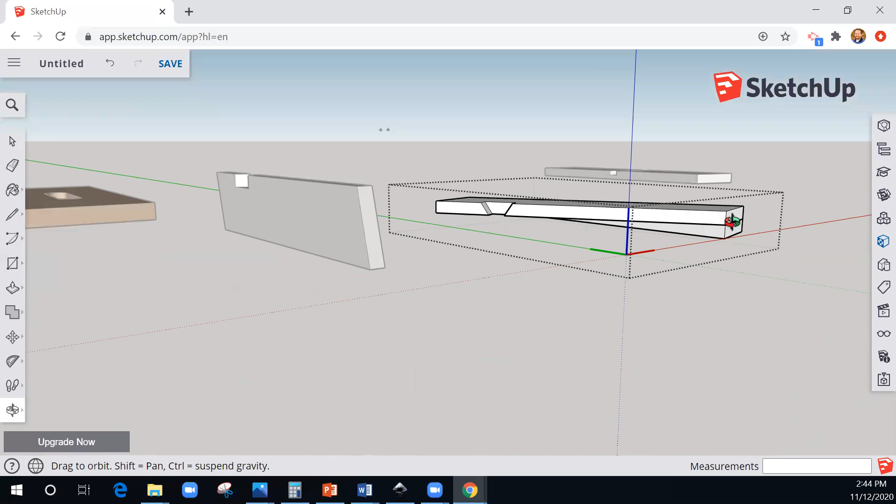Essentially what we want to do here is probably rotate it. We want that board to be on top of these. So we'll probably rotate these things again, make sure we're on that red axis. We hold that, we go there. We'll stretch this thing on that green axis, and then we'll make sure we're on that blue axis.

Oh, dang it, I was inside of my piece there. See how I just grabbed one of them? Good example. Let's see, rotate tool. We'll just select that thing, then we'll go rotate.

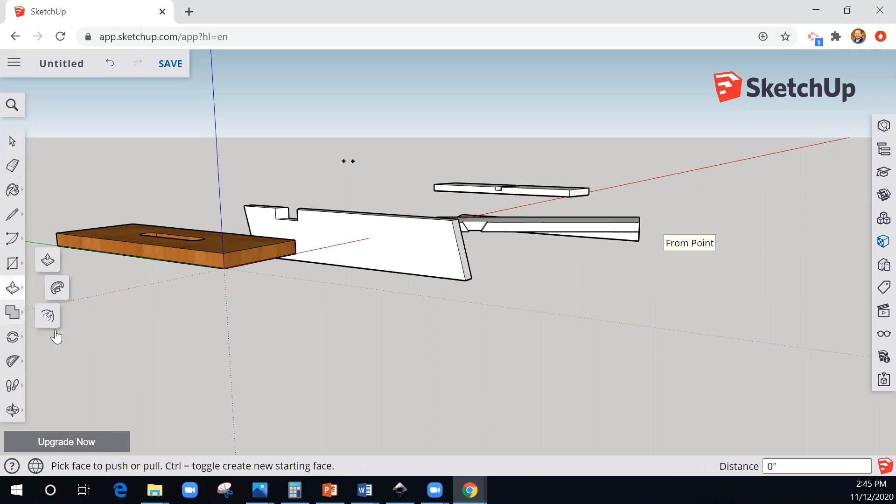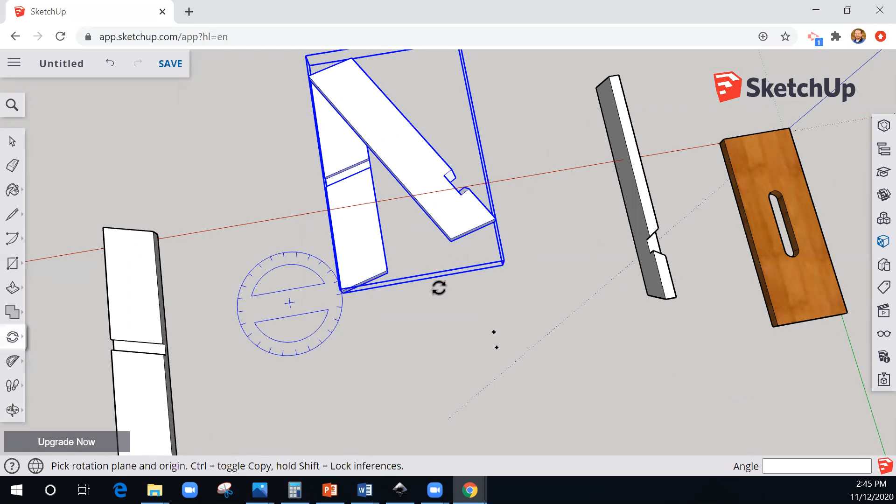Actually, you know what would be easier? Notice how we're kind of at an angle on this whole thing. It might make more sense for us to rotate them to where they are flat. So we could bring them over there on that red axis. That's going to make more sense there. So now we're kind of parallel with these things.

We'll select that thing again, we'll do the rotate tool, get us on that red axis, hold shift, click it there. I did that wrong.

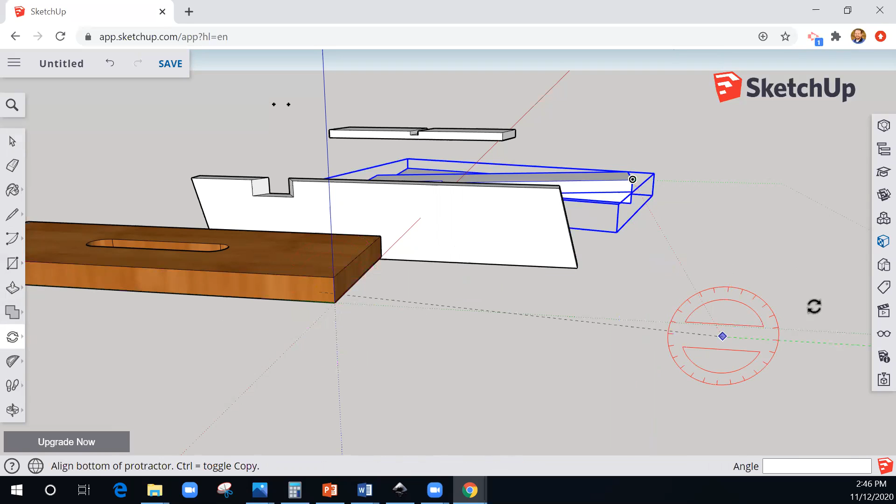There we go. We'll make sure we're on that green axis, and then we want to make sure we're on that blue axis. Was it right there? Even though it may look funky and it may look like it's not there, it is. Now we should be able to just take this thing and move it over. Sometimes you've got to orient it a couple times, and you change that position.

Now we want this thing to be in the center, so I might just grab the midpoint of that thing. It's going to select and grab that midpoint right there.

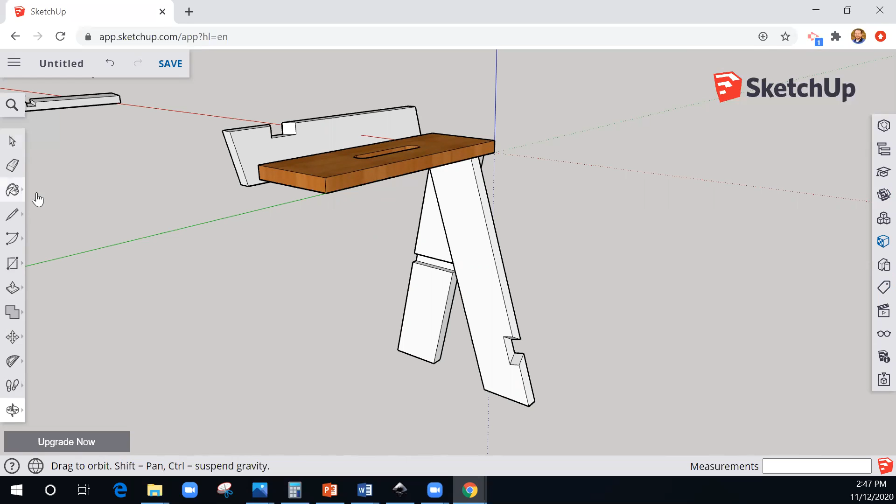And you'll notice we've got that one side of that leg that's going to be there. If you make these things as a component, like I said, you can paint them. So if you want these things to be painted, you can paint them. If you want to separate the different pieces, you can do that as well and color them different colors.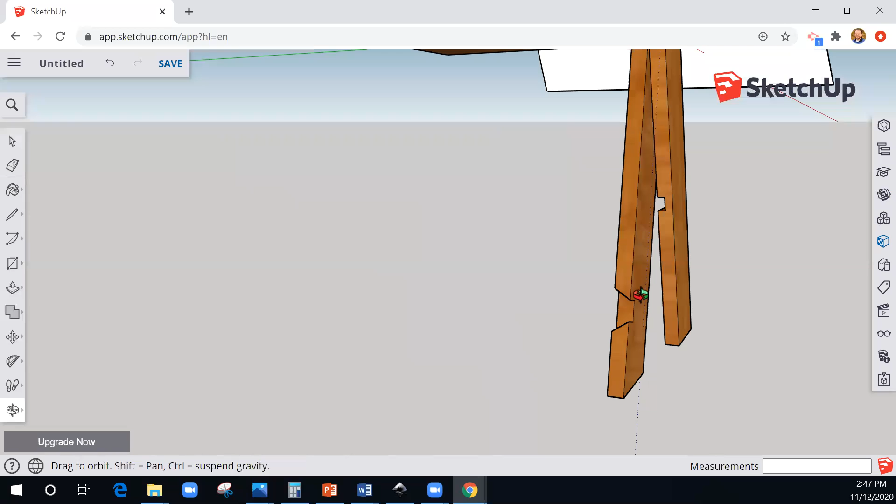But hopefully that gives you guys a little bit of an idea of what we need to do on these pieces, once you get the other leg together. This is kind of what I would recommend, pretty much the same thing if you do the bar stool as well. Once you get these things in there, you can simply draw a rectangle to fill in this back spot. You can draw one to fill in those things as well for the step, and then pretty much everything's going to be together at that point.

Yeah, I think that's probably enough information, unless you guys have questions or want to see something else. Orienting those pieces is really just the same exact thing that I did before.

Maybe I'll show you this back piece here, maybe we'll do that. So on this one, we want a triangle. We're going to grab our tape measure tool, get it to where we're oriented right. Okay, we're going to grab our tape measure tool.

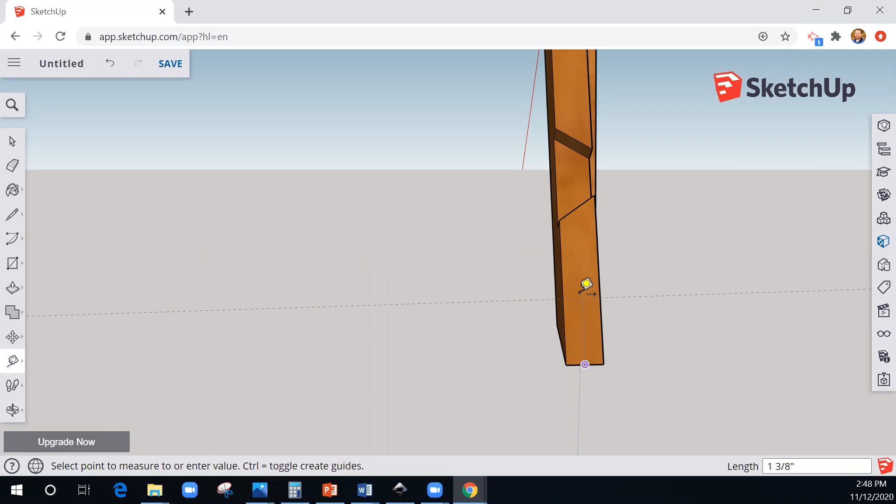If I wanted to do this, I could do my 3 inches up, I could do my 2 inches from here. That's wrong. I want to make sure that I'm on... see how it turns purple? That means I'm perpendicular. Now see how it's lined up with that line? It was off on that the last time.

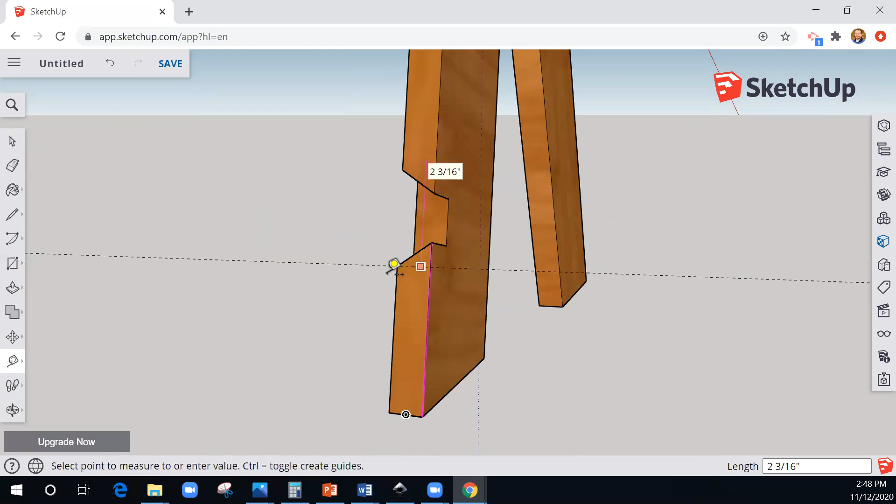And then we're going to go 2 inches there. That's going to ensure that those things are laying up against that leg. You can see that right there. We're going to draw a rectangle here, and this rectangle - sometimes the rectangles kind of have issues on the angles.

So what I'm going to do is draw a line. You'll notice I'm just drawing this thing right here. I'm going to follow this line here. These things need to be 12.5 inches. We're going to do the same thing right here, go 12.5 inches, and then we can connect these 2 points together. Notice we've got a full piece now.

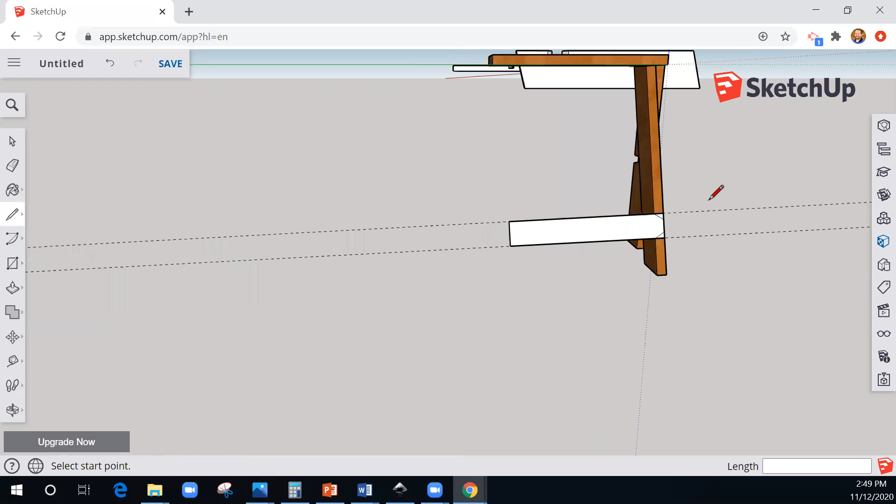On these ones, I put the wrong leg. This angle should go the other direction, it should come down right there. But we can edit this actually, and that's actually a good thing because I can show you that. So I grabbed the wrong leg there - this one actually needs to be over on the other side.

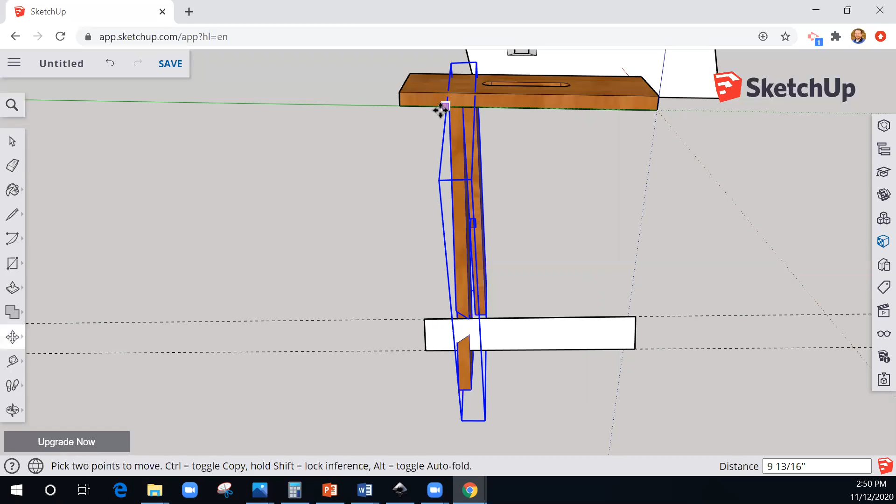And actually what we may do is maybe just move this thing over. Nope. Let's go explode - so we went explode, so now I don't have that as a component anymore, they're separate from each other. And what I'm gonna do is just move this thing right on that end there.

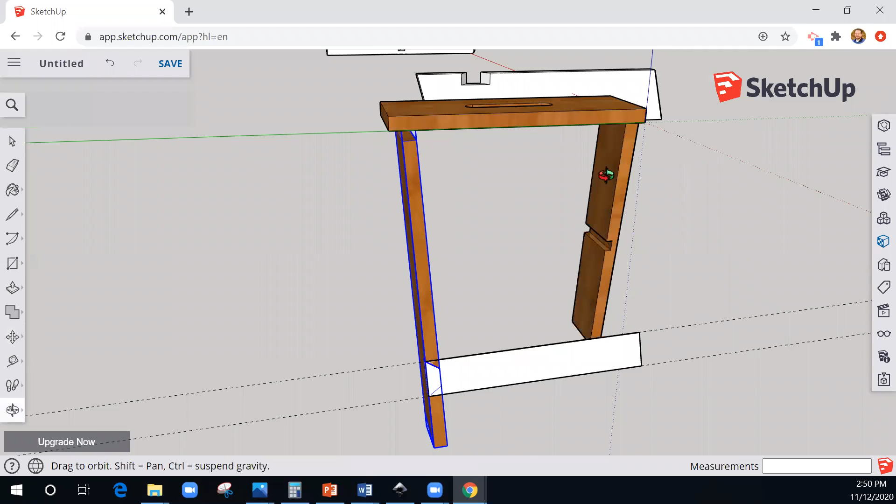I feel like this thing is tilted just a little bit. We are not exactly square on this thing. Anyway...

We'll get this stuff back in here, I'll show you kind of this. So now this is on this side. To cut this piece out, you could simply take this - we want to make sure we're not clicked on that, we want to be clicked on this piece right here. We can simply trace these things out right there.

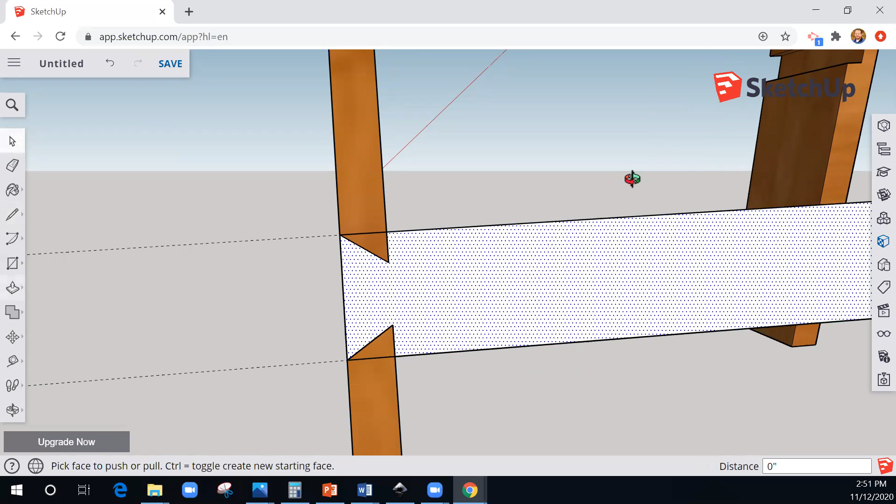And then we can select these pieces and delete those pieces out. If you did that on both sides, you could do that. And now what we want to do is push pull - we want this thing to be 3/4 of an inch. We can fill in that gap right there.

And you can see if we were to make this a component here, let's say back support, you could take this piece and move it out, and you'll notice it's got the cuts and everything that's there. If you want to put it back together, you can kind of do these things.

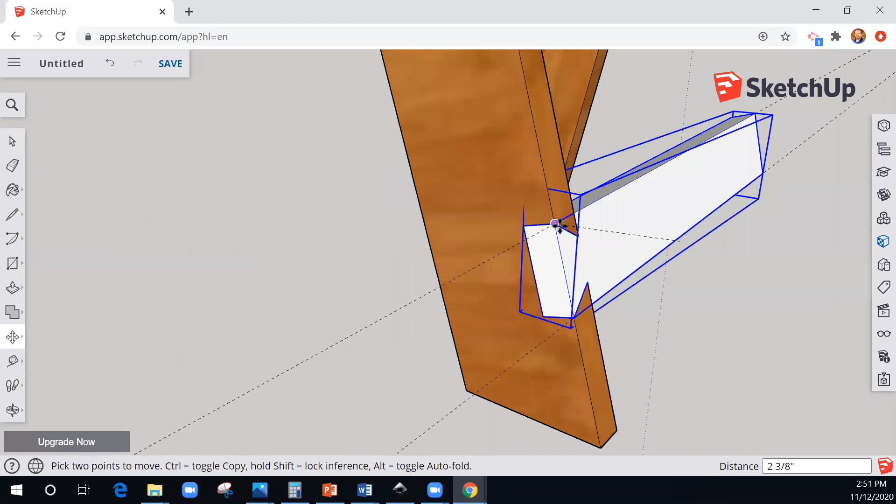It likes to snap to those points there, and we can get that stuff situated. Obviously my angle, when I made this thing, you can see we've got a little bit of an angle here, and we don't necessarily want that angle. So we can adjust this thing.

If I grab this and hold control and grab that one, I can rotate these things to where they are better. We want to make sure we are on this red axis, otherwise it starts tilting in funky angles and stuff.

I think we just moved just a little bit. Okay, so now we've got that. You can see how it's still, there's a little bit of an overlap here.

So we're going to get this thing fixed. We're going to go right here on this red axis. That's going to determine which direction we're tilting. Okay, hold shift and then grab it.

Grab the top piece, grab that bottom piece. Actually, you know what, that didn't work. Sometimes this one is pretty dang close to it. So what we're going to do...

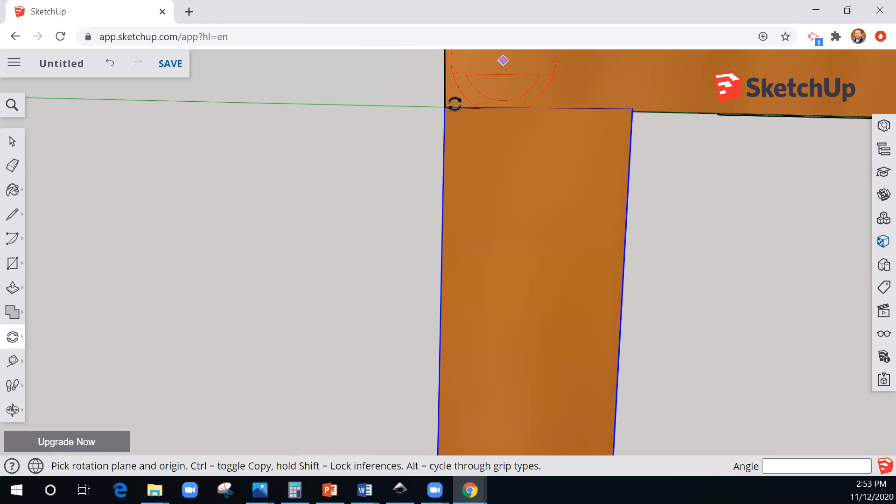is we're going to click it there. We're going to click on the top of that thing, and we're really going to kind of bend this thing quite a bit. And then what we're going to do is repeat that. We're going to grab that little corner there, come up to here, and then just until it's flat.

So now those pieces are oriented a little bit. I do need to take this thing and move it over three-quarters of an inch to fit that board. So I can just slide it and go three-quarters.

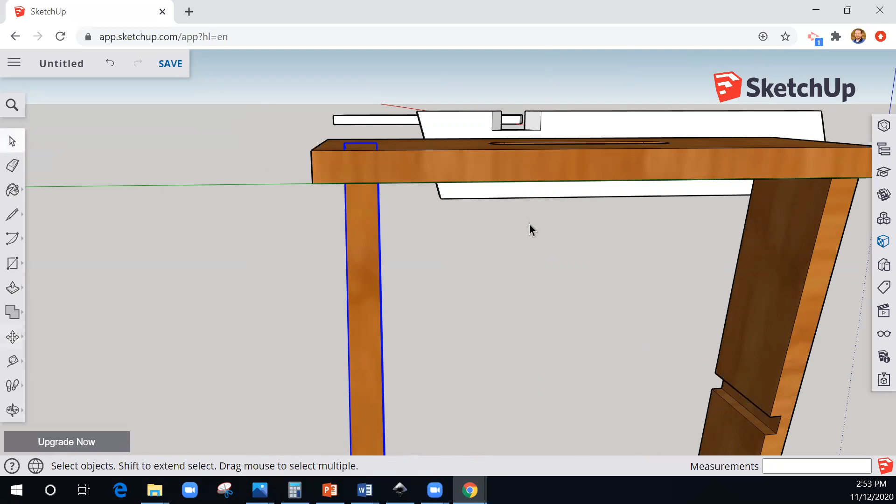And I can take my other piece there and move that stuff into there. So just kind of moving pieces, obviously put the other leg right there, get those ones oriented, cut that stuff out, put the step stool in there.

What questions do you guys have? I know I went through some of that stuff pretty quickly, but I did record this so you guys can look back at this and slow it down. You can repeat these things. But we've basically built this whole stool. We've got only a couple pieces left to do on here. But what questions do you guys have?

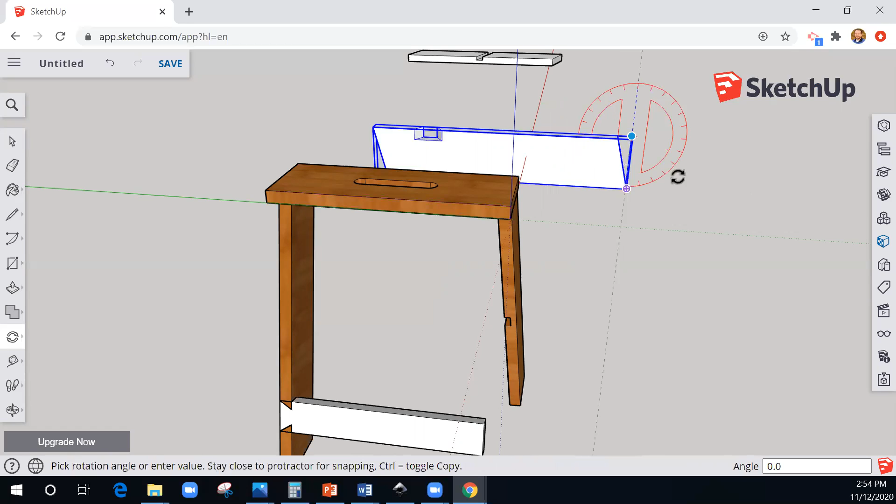I don't have a question about what you did, but when I went to go get the step stool directions that you put on, mine doesn't have the picture on the second page with all the measurements. I don't know if it's just how my computer downloaded it, or it could be that...

it doesn't have a PDF version of that. I don't think I did. I don't think I put a PDF version. I think I just did the Word version. And so let me see, let me go to... let me go to your guys's, what you call it, Canvas.

Yeah, I didn't put those. That's all just a Word document.

Okay, so I'm just going to upload. I'll put it in this week right here. I'll make PDF versions of those things and upload those, because sometimes pictures just don't transfer well from one program to another, or even if it's an older version of Word versus a newer version, that can mess things up and pictures don't transfer very easily over. So I will make a PDF version and upload them into this week's thing.

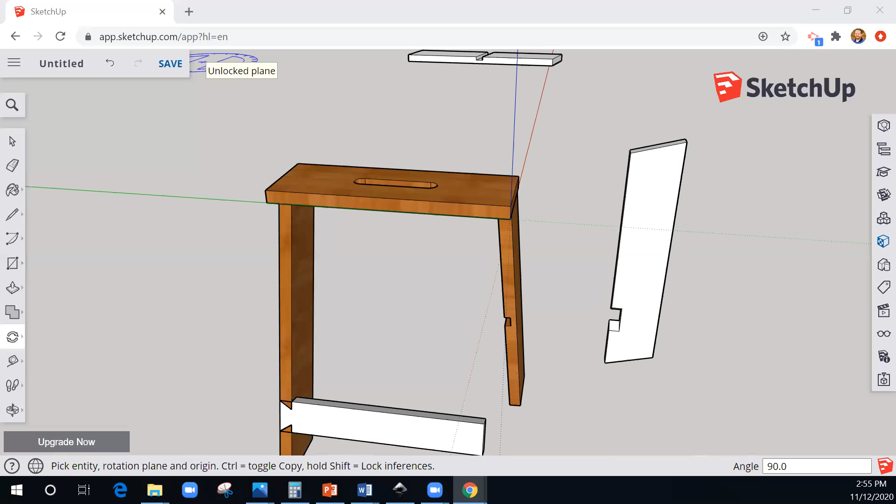I'll probably maybe even put them in last week's as well, so that way you can see those things and see the pictures, because the pictures are really important to be able to tell the dimensions of stuff. Without those, you can't make this thing. So thank you.